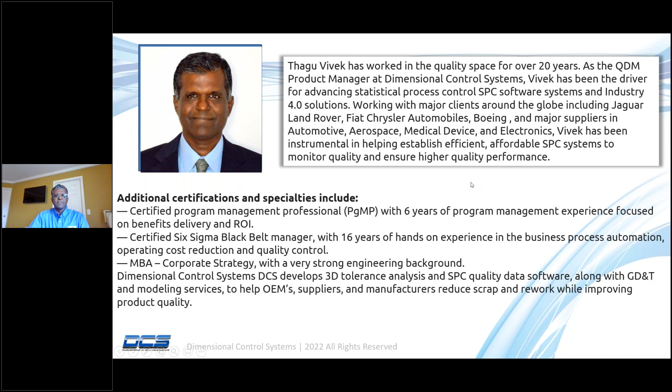We're going to try to mix a little bit of QIF with QMS and then see where the overlaps are and what the challenges are. As a company, we establish QMS systems within organizations, and we are now doing it under the umbrella of QIF at certain companies who have already onboarded QIF. So I wanted to give you an overview of that particular component, where the challenges are and what the benefits are of integrating QIF with the QMS system.

Just to step back a little bit, probably everybody is familiar with this, but I'd like to go through it just to identify which QIF components we heavily work on. So QIF starts from the product design. The document first embeds the MBD. From that, we determine the measurement requirements. Once the measurement requirements are done, that information is embedded into the QIF as resources and rules.

Then follows defining the measurement process, followed by, based off of that process, QIF Plans. The document gets added with the information about the plans, and that's sent to the measurement devices or the inspection devices to execute the measurement process.

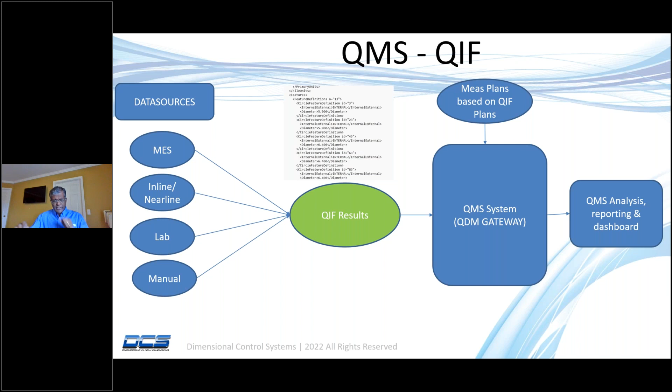So from a 100,000 feet overview, what are all the components from our QMS perspective? Number one is the gateway, where we centralize everything because data is coming from different sources. There is user management, there is alert management, there are the plant and the hierarchy, the bill of materials management. All those components of a QMS system are integrated into what we call our QDM Gateway.

And the main feeding component to that is the data that could come from different suppliers or different nodes from a supplier or different plants or different locations within a plant. We use a tool called Datagrabber that's been traditionally used up to before our QIF implementations, and now even as a mixture, to handle all these different variations of data that's coming in, to collect all this inspection data and centralize them into our gateway.

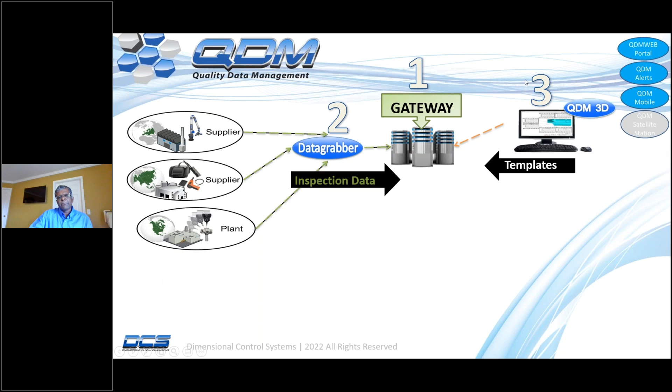The next component that we have is the QDM 3D, which is templates. So think of it like QIF plans. It's equivalent to the QIF plans component, which stores the relevant information on how the quality engineers would like to view this data in a graphical format, or from a dashboarding and alerting perspective. So templates are created for the bill of material parts and stored in the gateway.

Now, once those two components are there, QDM Web allows web-based access, as a QMS system, to get any type of data from any device and view it with dashboarding and email alerts. So from a very high level of a QMS system implementation, these are the very high level components.

When we talk about gateway, it doesn't just do this. It does a lot more than just a data processing system. Because when we talk about a company, the company has got hundreds and thousands of bill of material parts that need to be arranged and collated and presented based on the hierarchy of a part, a product, a sub-assembly, a system, all the way to the individual part.

So with that, the QDM Gateway, as one portal, allows plants and suppliers to share data, and quality engineers to create and monitor report requests. Sorry about that. Inspection departments receive work orders and update the results. Data managers can log in and receive and map report requests.

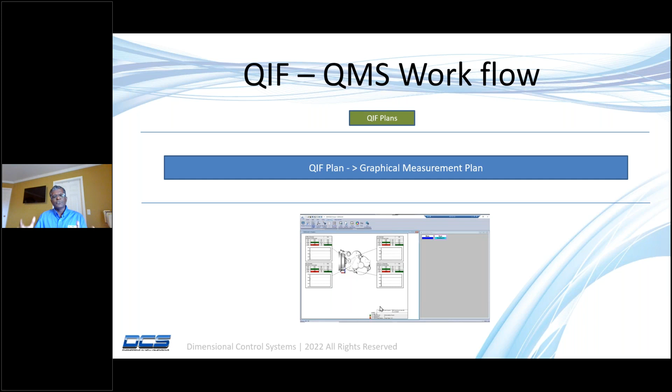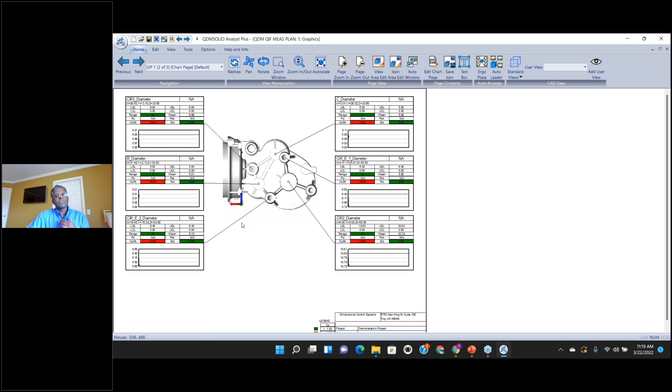So let me quickly escape out of here, and let's go through. Let's look at a plan. Oh, sorry. So plans are basically, we set this up with the CAD part, and the data that came from the QIF plans gives the ability to provide a visual context for a web-based user who is not on a CAD platform, not integrated into a CAD platform, and to be able to view any type of data, whether it's dimensional, non-dimensional, attribute, or any type of data.

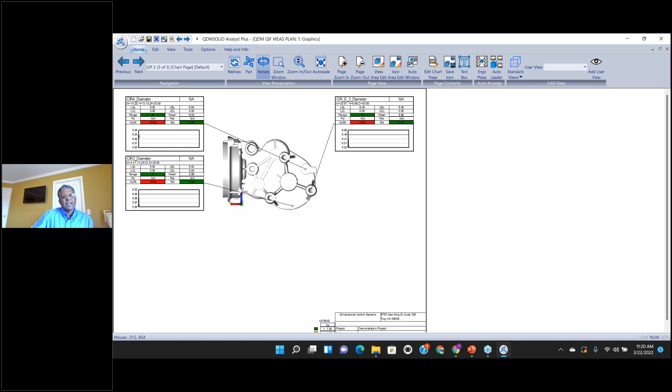So a plan primarily consists of what we call an index page with all the locations of the measurements, followed by n number of graph pages, which basically have placeholders for the data when the results are in place. So plans are basically blank reports. When the parts are measured, the plans can be populated with data. So this is from the plan perspective. And once we have the QIF results,

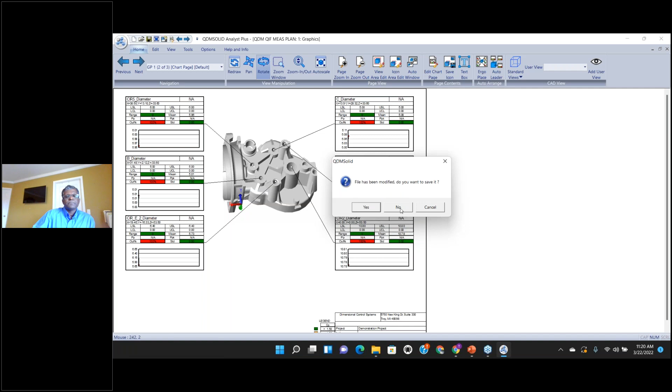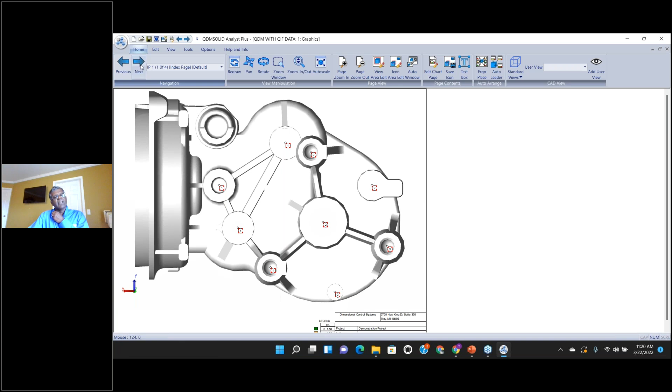so now I will open the... So when we load in the QIF data, the plan is converted into what we call a report, with statistics, with color-coded boxes telling whether it passed or failed for that particular measurement or GD&T, followed by n number of graph pages, which are all point and click, drag and drop, easy to visualize the data from a part perspective, with all the statistics calculated and color-coded statistics for the entire part.

So when you look at the plan and the part, these are the components that are primarily set up from a setup perspective. Now we're going to go into the web part, the QMS system itself, the gateway, to see how these components are used from a quality engineering perspective. So I'm logging into the QDM web gateway.

So, as we looked at centralizing all the data, we just looked at one QIF plan and report for one part, but this could be for hundreds of parts, for an entire bill of materials, set up in the gateway. So a user can navigate to a company, which is the highest level, to a plant that's making the part, the product type, the program that it belongs to, the subsystem, and the inspection program, so the results for a certain inspection.

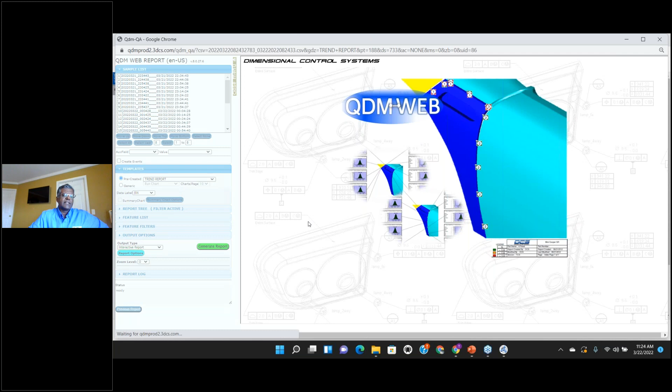So in real time, what it's doing is taking the data from the plant or supplier, wherever the QIF results are coming from that are loaded into the system, and adding that to a template that we saw previously, the measurement plan and the reporting templates, and it's creating a new report by merging the template and the data, a fresh report for the last 30 parts.

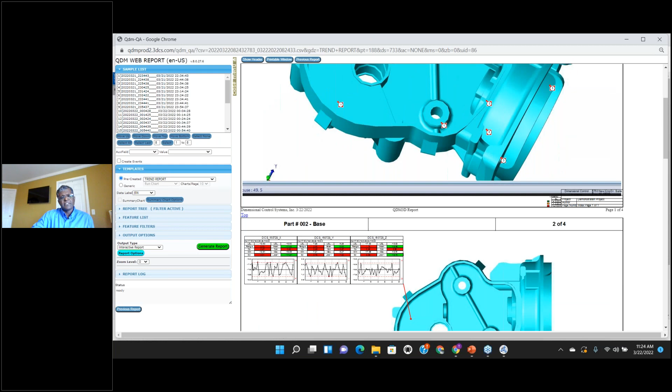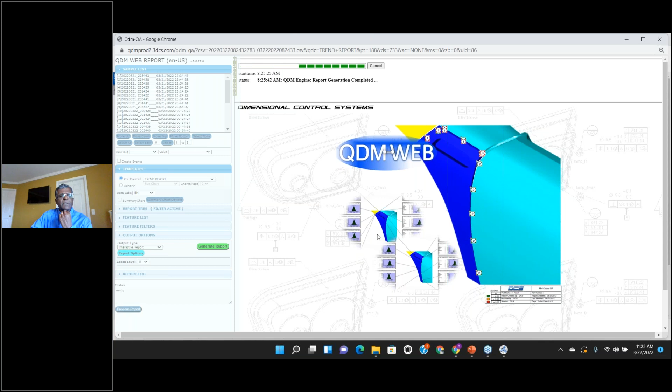So now we have the report for the last 30 parts with statistics for that particular part number from the quality engineering perspective, and to drill down and look at one of these parts at a detailed level, we can click on that, and it takes me to a detailed view of one of the features. If there is a feature that you want to look at in detail, the system generates a Six Sigma type of report for that particular feature, which includes pattern analysis with Western Electric rules, the run chart, the histogram, and the trend charts with all the statistics calculated.

And if we wanted to have more trace information, when we click on that feature, it tells me it belonged to that particular part number that was measured on that date and time. All this information was loaded from the QIF results when the part was measured and uploaded. The QIF results file was uploaded into the system, but the information is presented using this QDM gateway based on the workflow of the quality process within the company.

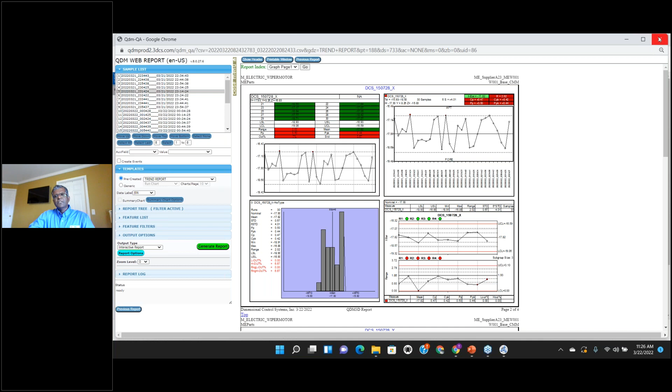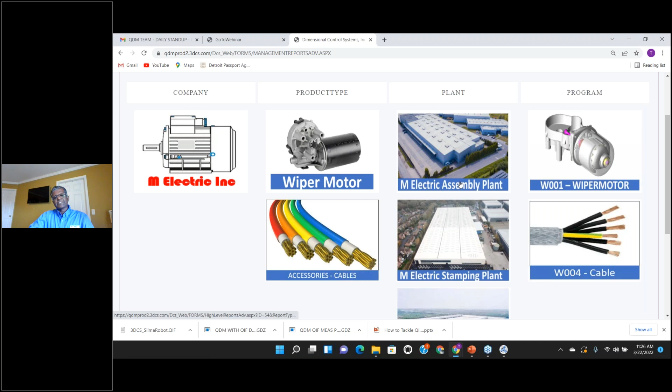So now we're looking at it from a single part perspective, but when we look at it from a company perspective, I'm going to start with a dashboard. This particular gateway houses the information for everything that particular company makes across the globe. The company is M Electric. They make 2 product types, wiper motors and cables. They make them in 1 assembly plant and a stamping plant and 2 primary suppliers. And these are the primary programs that are currently in production.

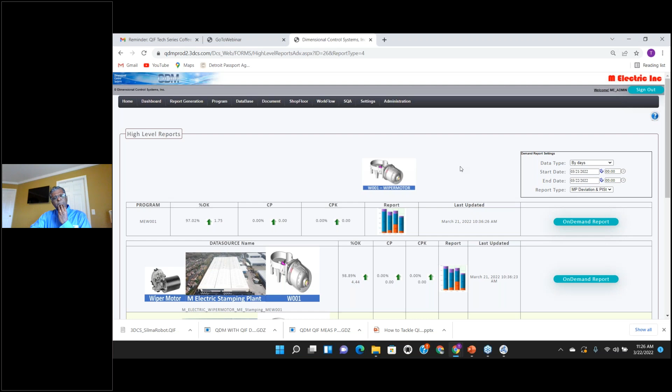So each one of these could have hundreds of parts under them with a hierarchy of bill of materials. So if we want to drill down and look at it at a high level, I'm looking at it from an overall wiper motor perspective. It is running at 97.02% in spec for all the features that are measured from the plants, the stamping plant, the suppliers, the assembly plant that belong to this particular wiper motor program.

And it breaks it down to individual data sources: how is the stamping plant contributing to the quality metrics of this wiper motor? How is the supplier contributing to the quality metrics of this program? So it breaks down and runs a report for that.

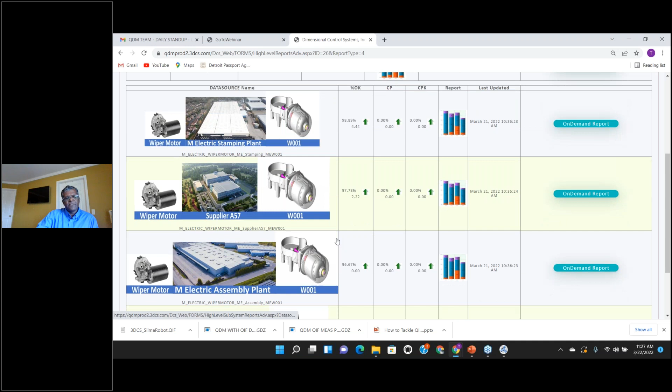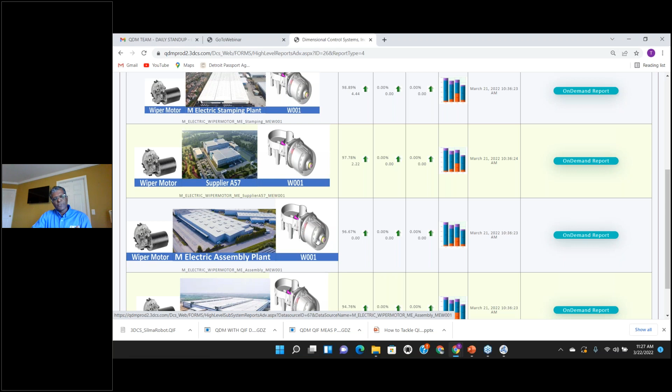We can also look at trends of how the trends are operating, so that you can see if there's a trend variation on a cumulative basis of all the parts. Now we're not looking at a single part here. We're looking at all the parts that are made at the assembly plant for this particular program, which is what this cumulative dashboard report is showing.

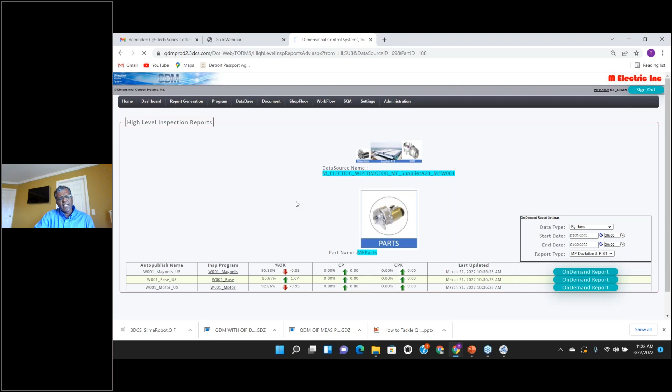So maybe we will start with the supplier, and we'll look at it at a part level. This supplier is making 3 components for this particular wiper motor, and let's say I'd like to look at the base, and now it takes me to the navigation screen for that particular base. Data for this came from QIF documents that are associated to it. So let me click on one of the QIF documents, and this is the QIF document that contained that information when we loaded it into the system.

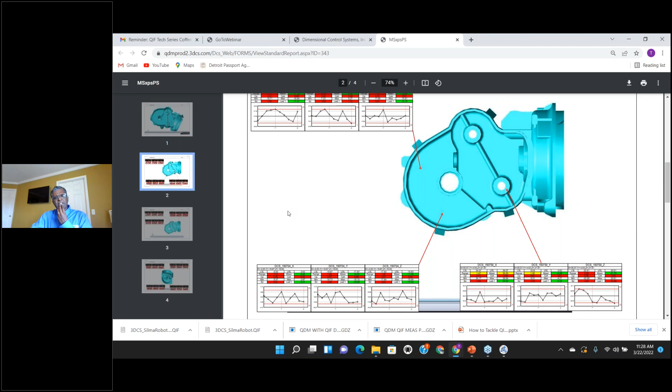So we have a link to the document as a part of the inspection itself that can be referenced for any future purpose. And from here on, we looked at it in the previous example of how somebody can quickly look at the last 10 part report that's automatically available. It's always running a last N part report as parts are measured, and email alerts and text alerts are sent to quality engineers who are monitoring this particular part number, so they can be alerted if one of these part numbers is going out of control, and they can take corrective actions

efficiently. So the system is a fully automated system from the overall QMS perspective, whether looking at it holistically from the dashboard perspective or looking at it part by part. But either way, the data is always collected part by part or sub-assembly or assembly, wherever the metrology is happening. But the system, based on the hierarchy, has the ability to roll them up and provide necessary quality metrics to the different stakeholders.

So let me go back to my PowerPoint here. So with this, from a QMS perspective, we're looking at data sources, data variations, and how QIF can handle that. Since we have a little bit more time, I would like to go back to the QDM Gateway for a minute and talk about the different mechanisms that we could load data from.

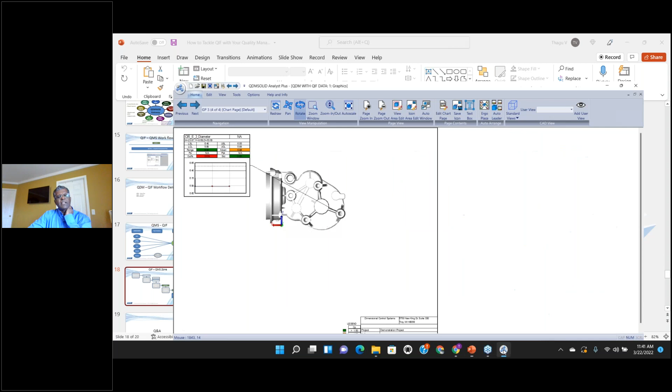The results are basically an outcome of the plan. So plans are telling what needs to be measured, identifying what's critical to quality, and creating a measurement plan for the metrology devices to measure those. Once the metrology devices measure those points or features based off the QIF information, there is a direct correlation between plans and results, and results can be applied to the plans to fill in the empty fields. Like the two components of the QDM I showed you, this is the results, which is basically the measured values for each of these measurements that was in the plan, and the plan would have just been an empty document of this.

So here he clarified a little bit. If you don't have a specific inspection plan, where would you start? Would you take maybe the CAD model with CAD points, or use a simulation result, or use maybe GD&T? If you have QIF, say a CAD model in a QIF container, since we're referencing MBD, and you didn't have a specific inspection plan, is there a way you could still get some results on your parts? Yeah, so then it's primarily up to the metrology device, which loads that CAD part, and they come up with a DMIS program or an inspection program based on what they deem critical to quality, and measure those points, and that's what's fed to us. So from a QMS perspective, we don't get into that.

All right, here's a great question from Sumit. Does the QDM database, as we're using as our example QMS system here, interface with a PDM or a PLM system? Can you use a PLM system as an input or output to it? Yeah, so from the QDM gateway part, the workflow, a PLM system workflow can be integrated into the QDM web gateway. So basically, the bill of materials that you have in the PLM system can be.

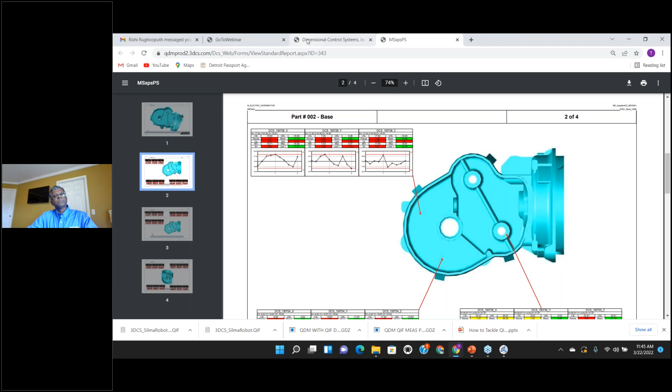So there are both specific and non-specific feedback loops you can use for that, depending on what kind of environment you have set up. A lot of QMS systems can output the measurement data based on the point coordinates so that you can utilize those in your CAD system. Ours also has some specific connections to our CAD integrated app, 3DCS, that makes it a very streamlined process to get that data back into your CAD model for analysis.

So depending on what your environment is, you don't necessarily have to be using the products that we have, but we do see that as a value add and see value in that. So we have provided some tools to make that a lot easier.

Yes, Ben, to extend on that, think of the QMS system that you see here as a repository for all your measurements in a very streamlined, cataloged method. So now that the data is available, if you want to take some measurements from the shop floor and feed it back upstream to the design, we have tools here to export this data into Excel or whatever format the upstream systems can take in, or you could download the QIF document and use it upstream. So multiple ways to take that data back to close the loop.